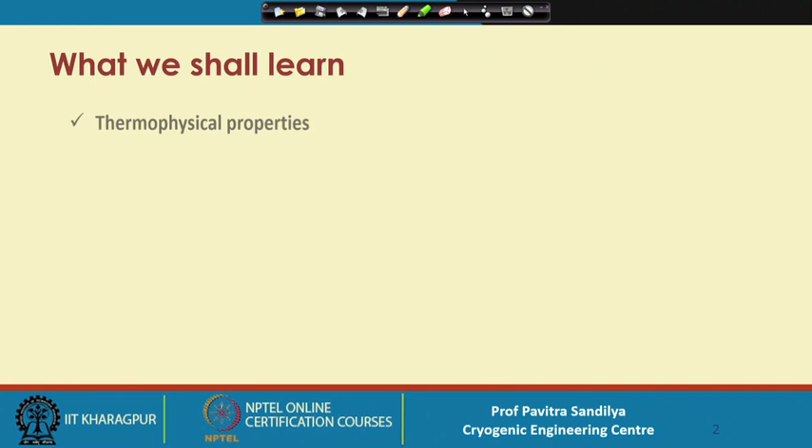In this particular lecture, we shall be learning about the various types of thermophysical properties, and under this we shall look into the gas specific gravity and pseudo critical properties, and we shall see how to estimate these two types of properties.

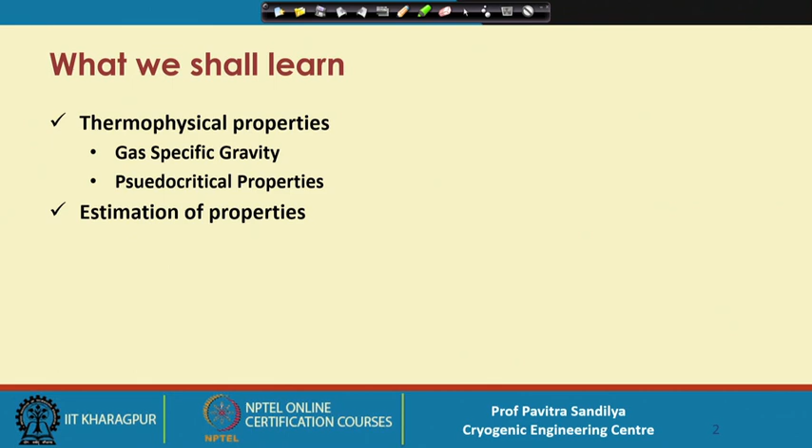Now, first let us see the classifications of the various types of properties of natural gas. The classification first is the thermophysical property, and then thermodynamic property, chemical property, and combustion property.

Thermophysical property means those properties which are dependent on temperature, that is the thermodynamics, thermophysical properties, and they also include some of the physical properties, about which we shall learn later. Here under this we have gas specific gravity, the compressibility factor, boiling point, freezing point, density, etc.

Similarly, we have thermodynamic properties, under which those properties are necessary for understanding and studying the energy transfer. There we have thermal conductivity, specific heat, heat of vaporization, heat of fusion, heat of sublimation, etc.

Then we have the chemical properties. This is especially true for natural gas, because natural gas has many components which may be reactive, which may be soluble to other liquids. So here we have reactivity, solubility, and hydrogen bonding, which is not a property in itself, but it dictates many of the properties of substances. Especially we know that in case of water, this bonding plays a very significant role.

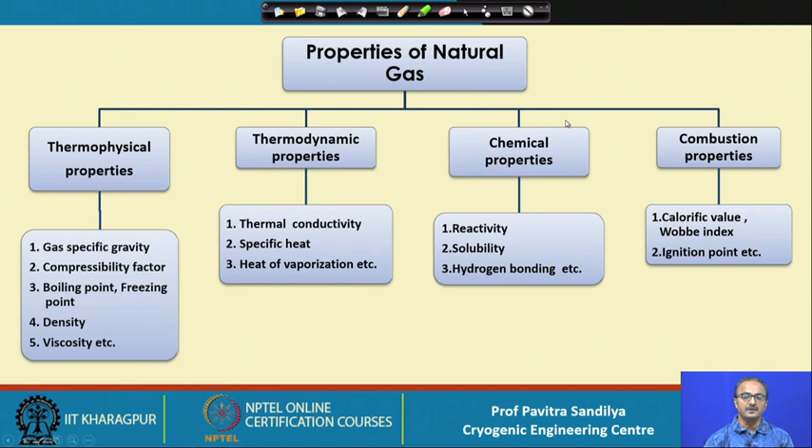And lastly, we have another property which is unique to natural gas and oil, that is the combustion properties, because they determine the type of the natural gas, in the sense of how much energy we may be able to derive by the combustion of the natural gas or oil. So these are related to the calorific value, and there is another parameter, the Wobbe index and the ignition point, etc. So first let us go into the physical properties of natural gas.

It has been found that natural gas is colorless, odorless, non-toxic, and lighter than air. When we say non-toxic, it generally means that under normal conditions it will not cause any kind of problem, unlike carbon monoxide or carbon dioxide. And lighter than air means that if there is any kind of leak, it will move up through the air and get dispersed. So that is the significance of lighter than air.

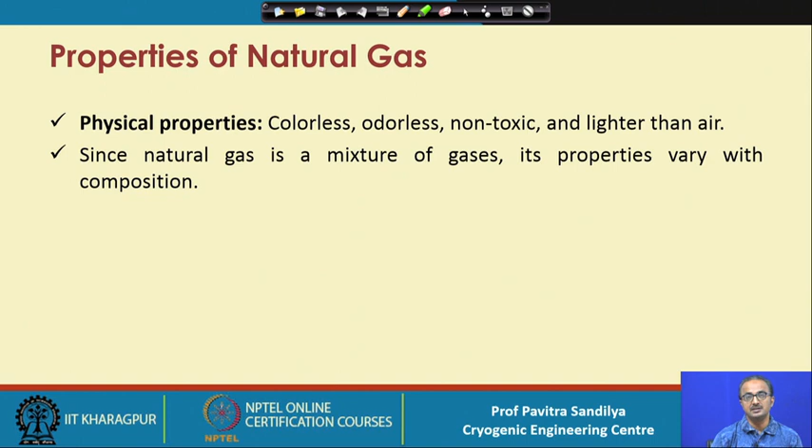Since natural gas contains several components, its properties will vary with the composition of the natural gas. Hence, we find that natural gases in different reservoirs around the world will show different types of characteristics and behavior when handled for the various types of processing we do with natural gas.

The properties are estimated by using some appropriate mixing rule. Why do we need a mixing rule? Because we might know the properties of the individual components of the natural gas, but when we want to find the average property of the natural gas, we need an appropriate mixing rule. And we have to understand that finding the mixing rule is not a very simple job, because we have to figure out what kind of mixing rules will be appropriate under certain conditions.

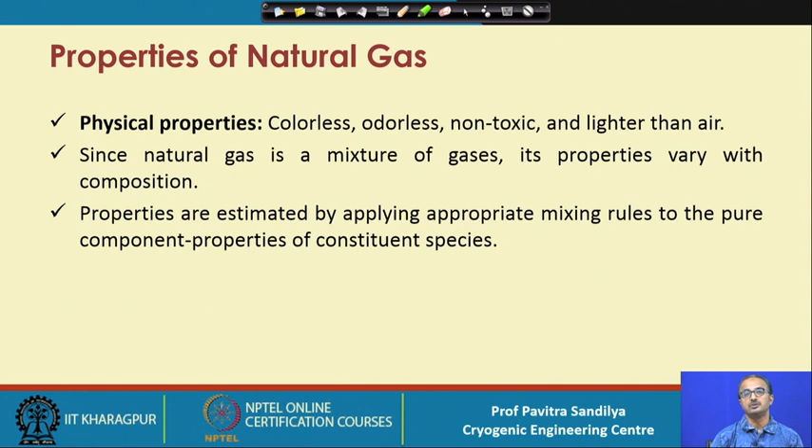Several researchers around the world are working on evolving mixing rules if the existing ones do not apply. So it is very important to know that mixing rules have to be appropriately chosen to find out the overall property of the natural gas.

Now let us see the significance of these properties. Like for example, we come to compressibility factor. Perhaps you will know about it, and we shall learn about it also.

This compressibility factor is used to find out the density and viscosity, and these dictate the flow characteristics. For example, Reynolds number has both density and viscosity in it, so it determines the type of flow in a pipeline and how much resistance there will be to the flow, determined by the viscosity. These quantities are obtained from the compressibility factor, and density and viscosity also determine the type of flow and the compressor power. That means if we are using any kind of pump or compressor, the power required to make the flow happen is determined by density and viscosity.

Next, we look into heat capacity and thermal conductivity. Heat capacity is the amount of energy needed to change the temperature by a degree per unit mass of a particular substance. That also signifies how easy or difficult it will be to change the temperature of a substance - how much energy it can retain inside itself is the heat capacity. Thermal conductivity signifies how fast energy can be conducted from one location to another.

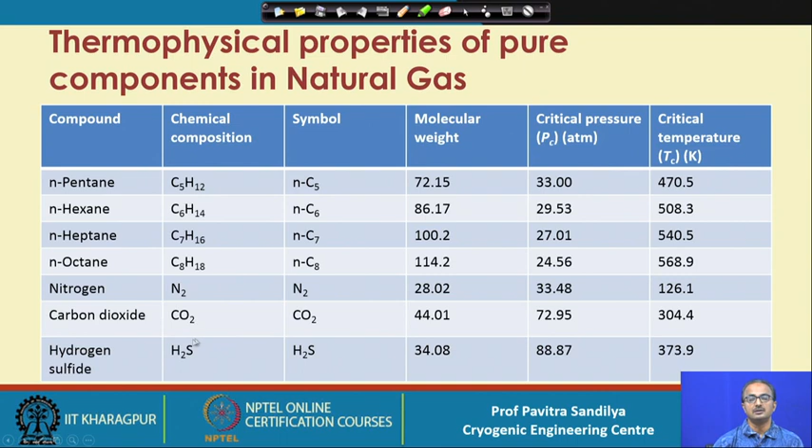In this table again we find some other components like pentane, hexane, heptane, octane. We stop up to octane because we have to remember that natural gas cannot have too heavy hydrocarbons, because if heavy hydrocarbons are present, they will tend to go to the liquid phase rather than staying in the vapor phase. So natural gas generally contains up to C8, that is octane. Other components present in natural gas are nitrogen, carbon dioxide, hydrogen sulfide, and as shown in our previous lecture, some radioactive materials are also there.

Now let us start seeing how we estimate the property of natural gas. First I start with the gas specific gravity. Specific gravity represents the ratio between the density of a substance to the density of a standard substance. People can use different types of standards. Somebody can use water as a standard, and generally we use water as standard. Sometimes for gases we use air as standard.

So the gas specific gravity in case of natural gas is defined the way we define it in general: gamma g is the gas specific gravity, defined as the density of the gas to the density of the air. We have to remember that gases are compressible, so their densities are a strong function of both pressure and temperature. So whenever we say the ratio of density of gas to density of air, we have to understand these refer to some specific temperature and pressure. With respect to that, we can represent the density in terms of a compressibility factor.

As I told you in the earlier slide, this compressibility factor is a very important parameter to find density and viscosity. So here we represent the gas specific gravity in terms of the compressibility factor, where M represents the molecular weight and Z represents the compressibility factor. At standard conditions, generally the compressibility factor of the gas and air are almost the same. So if these two Z values are the same, we can write the gas specific gravity simply as a ratio of the molecular weights, the molecular weight of the gas to the molecular weight of the air.

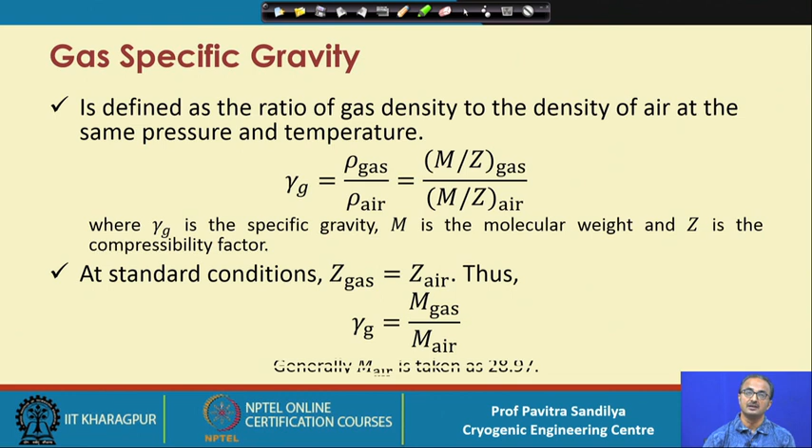Then, if we know the value of the specific gravity, we know how a gas would behave when it leaks. Leakage behavior is important to know because it has a direct bearing on safety - if some toxic gas is not dispersing well, it settles down, like what happens in case of LPG, which may settle because it's heavier than air. So it will have direct safety issues for us. It is important for us to know the gas specific gravity.

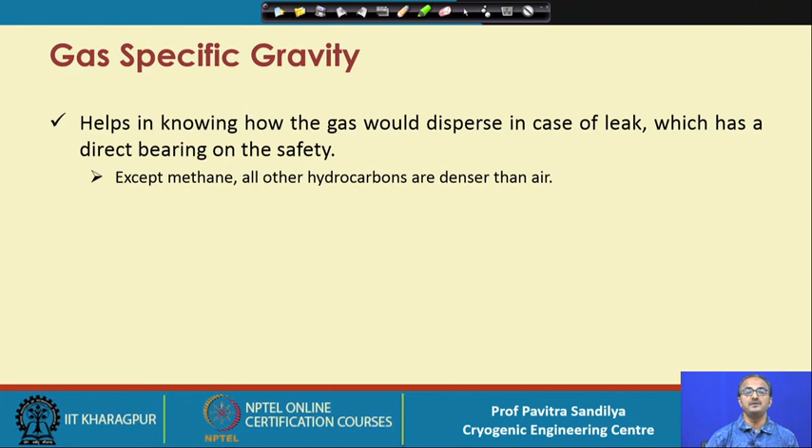Except methane, all hydrocarbons are denser than air. Since natural gas is primarily methane, natural gas is generally lighter than air. But if you look at LPG, which is basically isobutane and some amount of propane, that is heavier than air. So if there is any gas leakage from a gas cylinder at home, it will settle down rather than moving up. That is the knowledge we gather from the gas specific gravity.

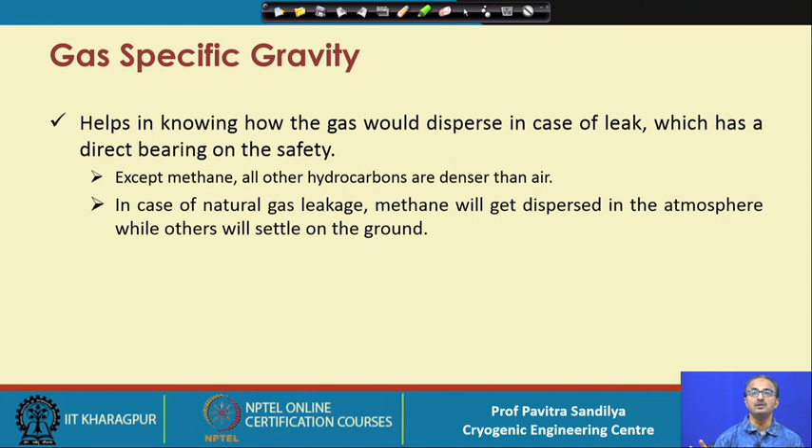So in case of natural gas leakage, methane will get dispersed in the atmosphere, while other components like ethane, propane, etc., will tend to settle down. So methane will be going into the atmosphere, moving away from the point of leakage.

Now next we come to another very important set of properties before we proceed to find out the other properties: reduced properties. Why do we need reduced properties? You know that whenever we talk of density or other properties, there are different components and different combinations of temperature and pressure, giving different property values. It becomes a mind-boggling affair to archive or develop any kind of database. So one way to ease the representation of properties is through these reduced properties.

So what are reduced properties? Reduced properties represent the state variables of any fluid that are normalized using the critical values of those variables. What is the meaning of the state variables?

State variables are those variables which represent the state of a system. For example, we represent them in terms of pressure, temperature, volume, etc. These are state variables, and when we normalize them using their values at the critical point, we have the reduced values. So we have reduced temperature, reduced pressure, reduced volume, and so on. Now let us take these one by one.

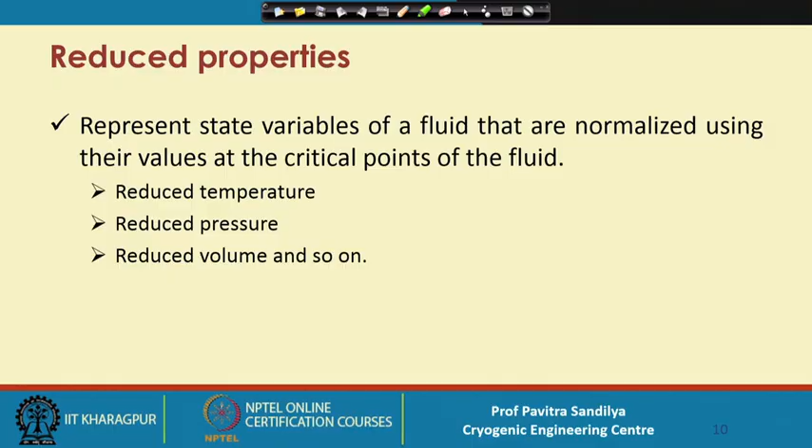First we come to the general definition of reduced pressure and reduced temperature. These values are given with a subscript R, so PR means reduced pressure, and TR means reduced temperature. These are defined as the ratio of the actual value to the critical value. So reduced pressure is the ratio of pressure to critical pressure, and reduced temperature is temperature divided by critical temperature.

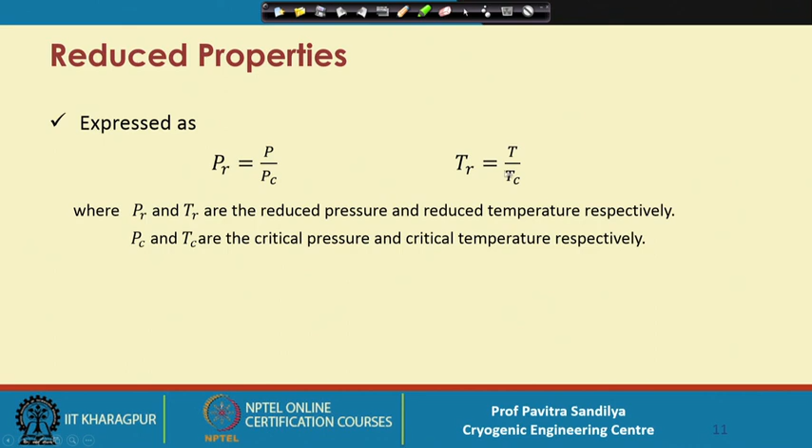Now, when we talk of a mixture of gases like natural gas, we do not have a single critical value of any of the properties, because it is made of several gases. So in that case we have to figure out how to represent the reduced values. To know that, we need to know how to get the overall critical values.

So first let us go to the definition that pseudo reduced properties are similar to the reduced properties we define. Pseudo means it is not actual—there is a slight correction in spelling, it will be P-S-E. So it is pseudo reduced property, meaning it is not actual, it is fictitious. Sometimes this is also called apparent.

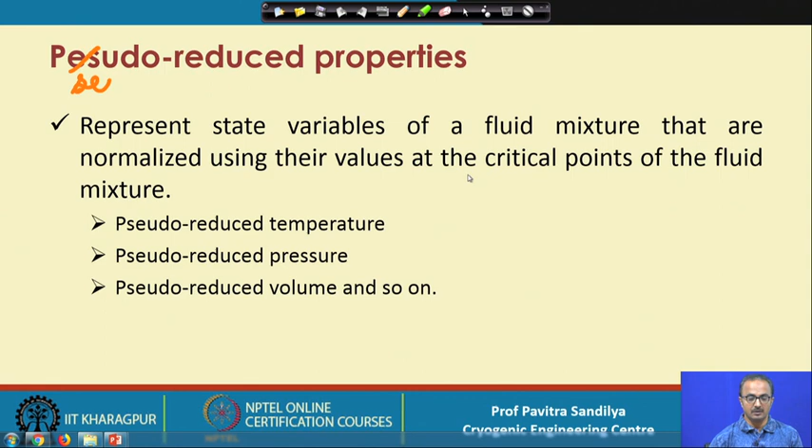These pseudo reduced properties are defined in a similar manner as reduced properties for pure components, as the ratio of the value of the state variable to their average values at the critical points. So similar to reduced temperature, reduced pressure, etc., we have the definitions for the various pseudo reduced properties, where P stands for pseudo and R for reduced. So we have pseudo reduced pressure, pseudo reduced temperature.

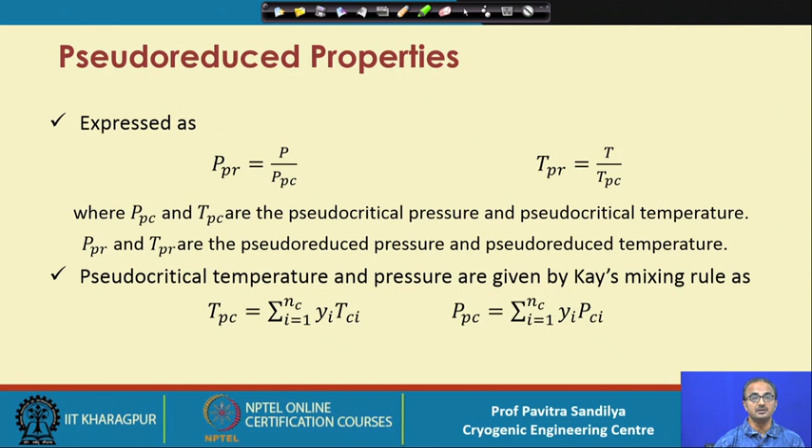This is defined as the pressure divided by the pseudo critical pressure, and temperature divided by the pseudo critical temperature. Now, there are various types of mixing rules, and a very common one is given by Kay. This mixing rule gives the pseudo critical property as a weighted average with respect to mole fraction. So TPC equals the summation of the product of mole fraction and critical temperature of each component. Similarly, the pseudo critical pressure is the summation of the product of mole fraction and critical pressure of each component. That is the mixing rule for pseudo critical temperature and pseudo critical pressure.

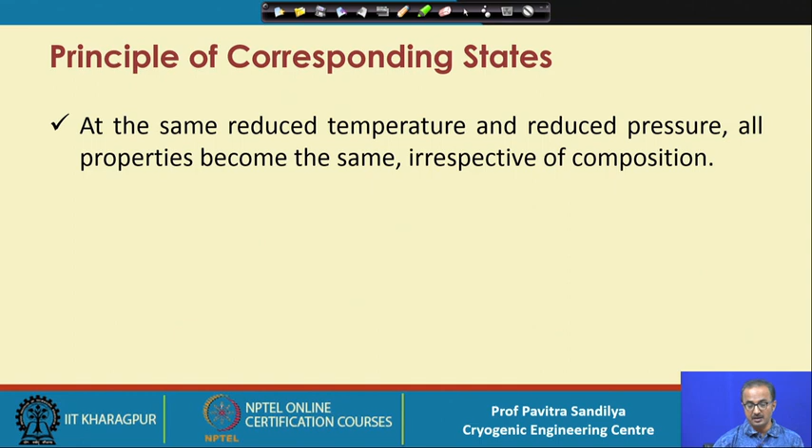Now, there is a very important principle, the principle of corresponding states, which perhaps we already know. It says that at the same reduced temperature and reduced pressure, all properties become the same irrespective of composition, and this makes our life easier in maintaining databases. So if we know the reduced temperature and reduced pressure of various gas samples, we know their reduced properties will also be the same.

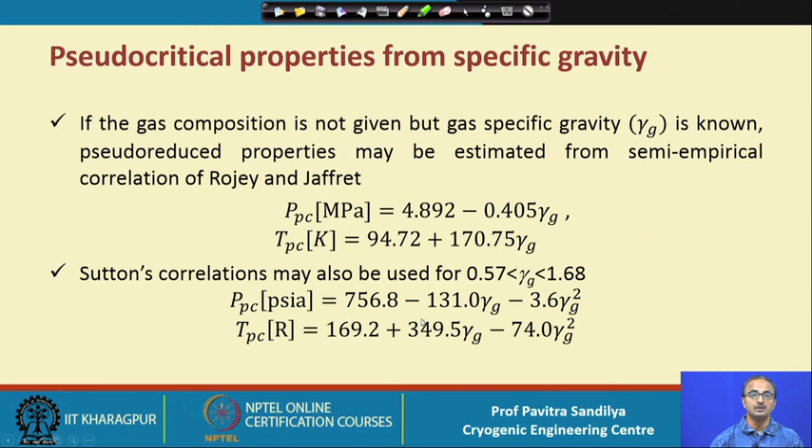And there is another set of expressions for the pseudo critical pressure and temperature given by Sutton. But here you see there is a restriction on the value of specific gravity, so within this zone this particular expression may be used without knowing the actual composition of the gas.

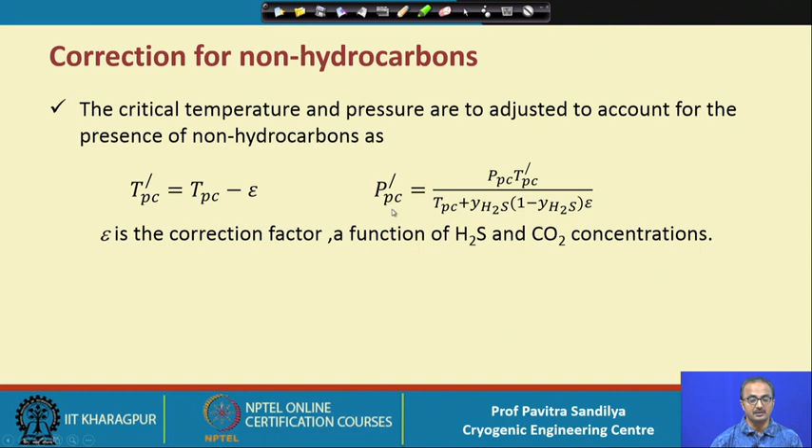It is also important to know that these properties are affected by the presence of non-hydrocarbons. People have proposed various types of correction factors. The prime represents the corrected pseudo critical temperature and corrected pseudo critical pressure, and epsilon is the correction factor which accounts for the presence of carbon dioxide and H2S. This may be obtained graphically or from correlations where the correction factor is related to the mole fraction of carbon dioxide and hydrogen sulfide. This expression may be incorporated to correct the pseudo critical temperature and pseudo critical pressure.